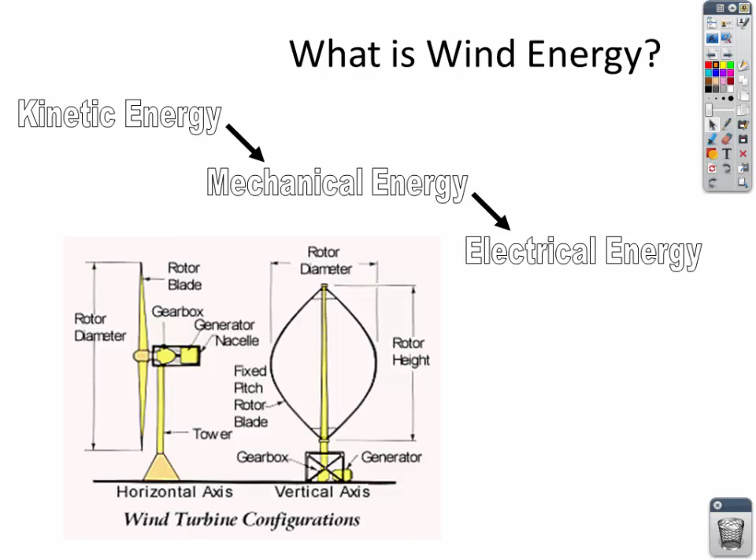What the gearbox does is it takes this rotor and it accelerates the spinning of that rotor to generate a little bit more electricity within the generator. So that gearbox is an integral component, but if you notice here, very simple process. Using the wind to turn a turbine, that rotor is connected to the turbine, which is connected to a generator to create electricity.

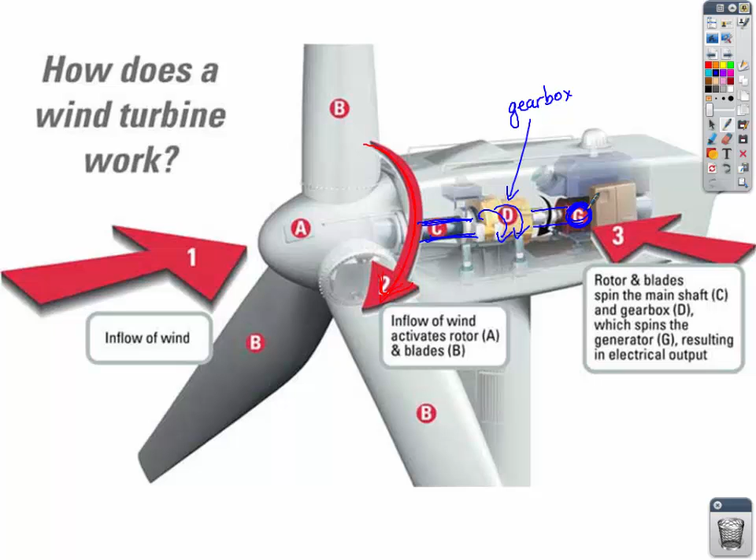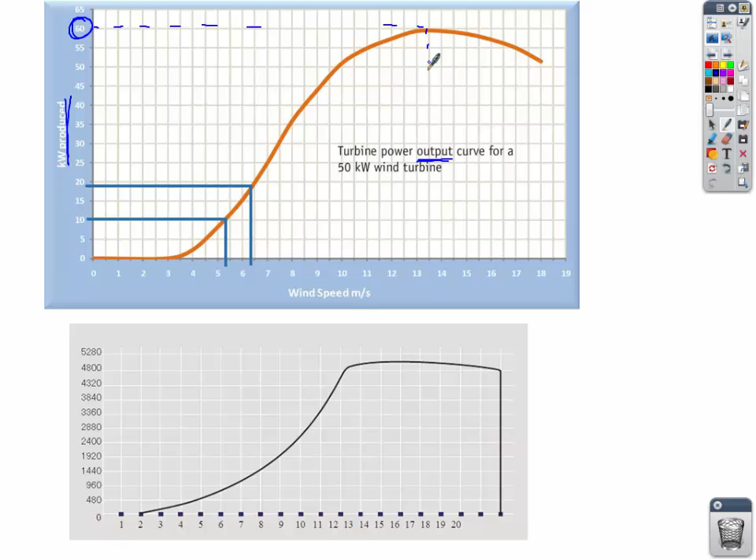What's interesting is a lot of people think that the faster those turbines spin, the more energy you're going to create. It's actually the opposite. There's an optimum output for wind turbines. If you notice here, kilowatts produced is along the y-axis, and we're going to max out around 60 kilowatts produced. But that occurs at around 13-14 meters per second for wind speed. The faster the wind speed, at some point, around 15 meters per second, you're actually going to start creating less energy. And at some point, the turbine is going to shut off altogether.

What this does is it protects us from thunderstorms and hurricane winds. The turbine doesn't spin as fast as it possibly can, because it might break. It might cause mechanical failure. So what they're programmed to do is, at a certain wind speed, literally shut down. So it's not the faster the better. There's an optimum range for power output when it comes to the spinning of a wind turbine.

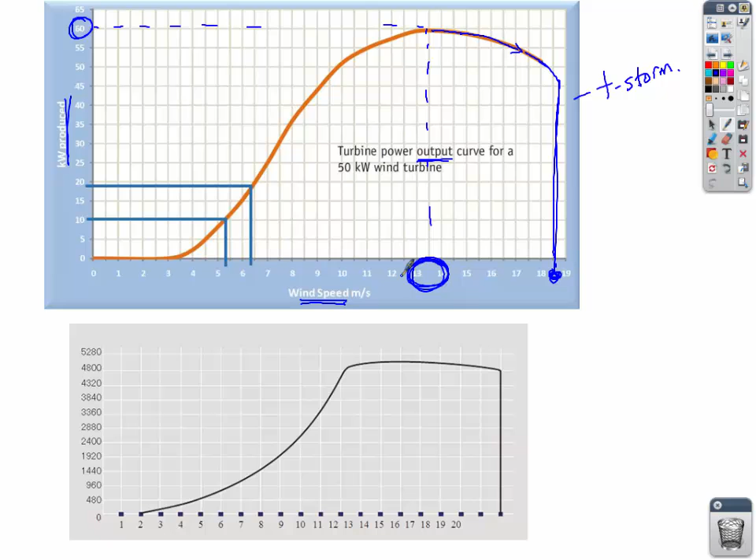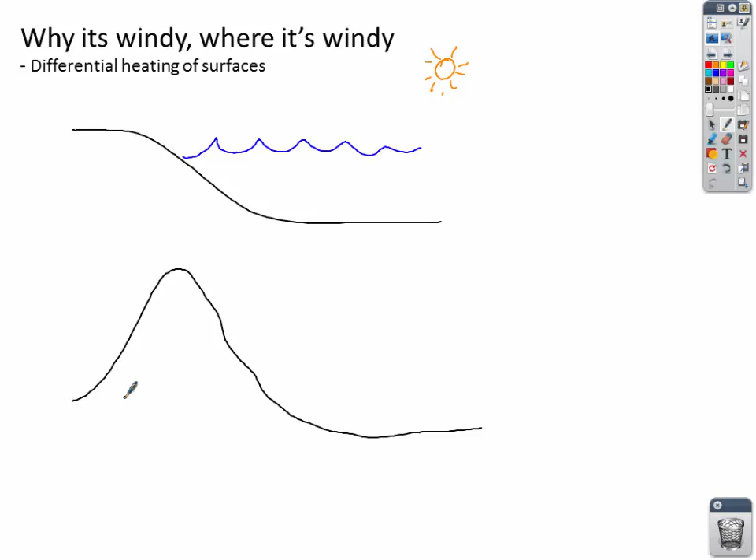What we're going to do here is draw the beach, okay, get you all excited for going to the beach this summer. And then we're also going to draw a mountain and a valley. And let's name this mountain the Rocky Mountains. And let's name this valley the Great Plains. Okay, this lesson on meteorology is the heating of two different surfaces.

For example, during the day at the beach, the sand is going to heat up a little bit faster than the water. So air is going to start rising over the sand. Well, in turn, air can't not exist at the surface, so air needs to be replaced. So it comes in from the ocean. So you have what's called a sea breeze. Right, air coming from the ocean.

Alternatively, at nighttime, the sand will cool quick and air above the water will rise. So air gets replaced from the land. So you have a land breeze. Nevertheless, you always have a breeze, day or night. There's always air moving because of the differential heating of these two surfaces.

So this is where we're going to put our wind turbines. We'll put it either offshore or we'll put it just on land, because it doesn't matter to the wind turbine whether the air is coming from the land or from the ocean. As long as air is moving, there's wind. Okay, so we'll put them in those locations on coastlines.

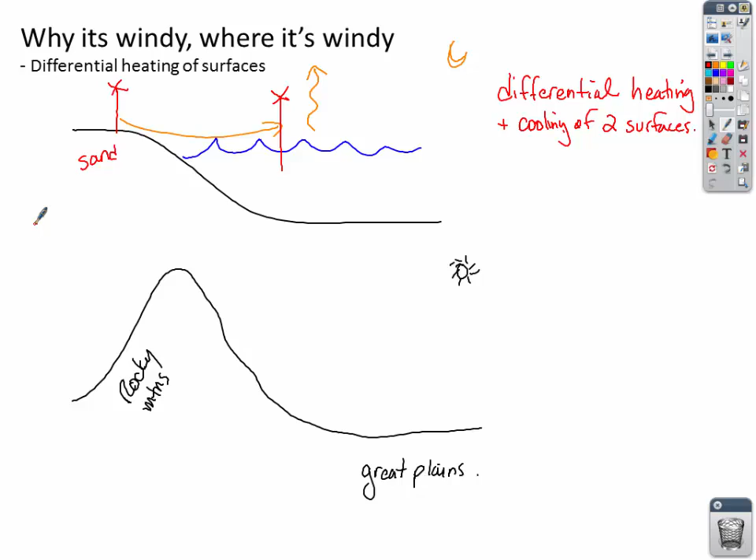Alternatively, look down here during the day, all right, at the Rocky Mountains. You have two different surfaces. You have rock and you have soil. All right. During the day, the air above the rock is going to heat faster and therefore rise. So you have air being replaced from the valley.

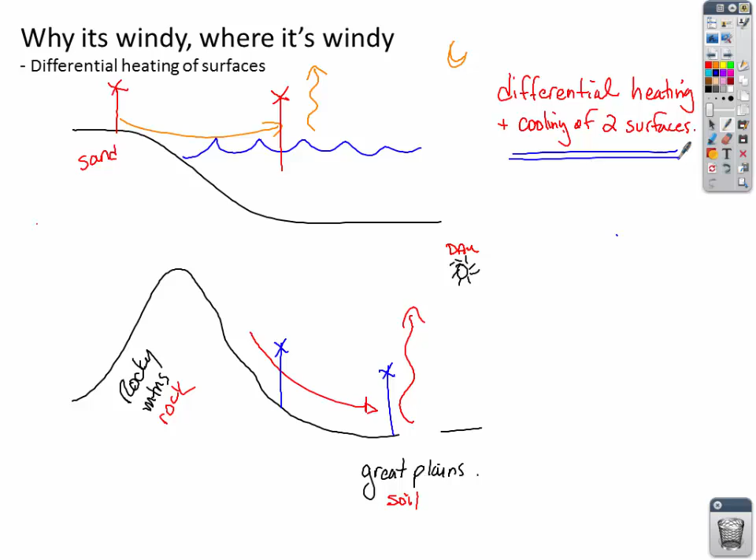All right. Over the course of the nighttime, you have the opposite. The valley will hold its heat a little bit longer, and air above the valley will rise, and it'll get replaced from the mountains. So here is a second place where we'll build our turbines, at the mountain and the valley provinces. All right, so because of that differential heating and cooling of two different surfaces, we have air moving in these places, coastlines and in valleys.

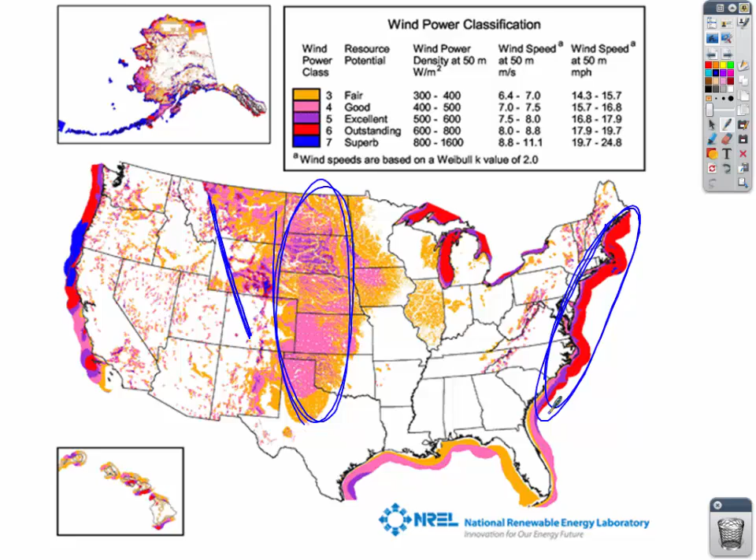Doesn't really work down in the southeast, all right, where it's just so warm. The difference between the heating and cooling rates really isn't there. Okay, so it's not really a good place for wind down in the southeast of the United States. So at the top 10 states, you're looking at Texas, all right, Kansas, Montana, those in the wind belt.

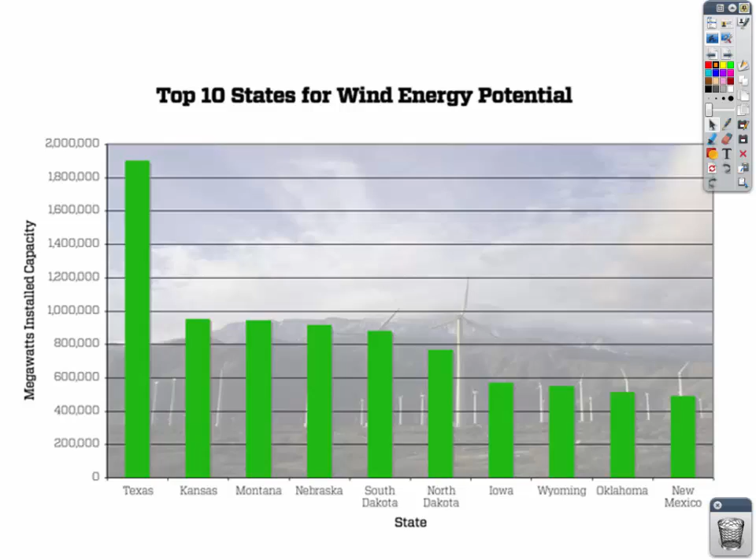Pennsylvania, you will see wind turbines as you get into these mountainous regions. If you take 309 or the Turnpike North, you'll start seeing wind turbines as you get into these mountain and valley provinces where there's wind at enough scale and enough reliability that you can get energy out of them. So you'll see these bands as you either drive west or you drive north and west. And then along Erie here, because of the land and the water, differential heating and cooling of those surfaces, you'll see wind turbines in and around the Erie area as well.

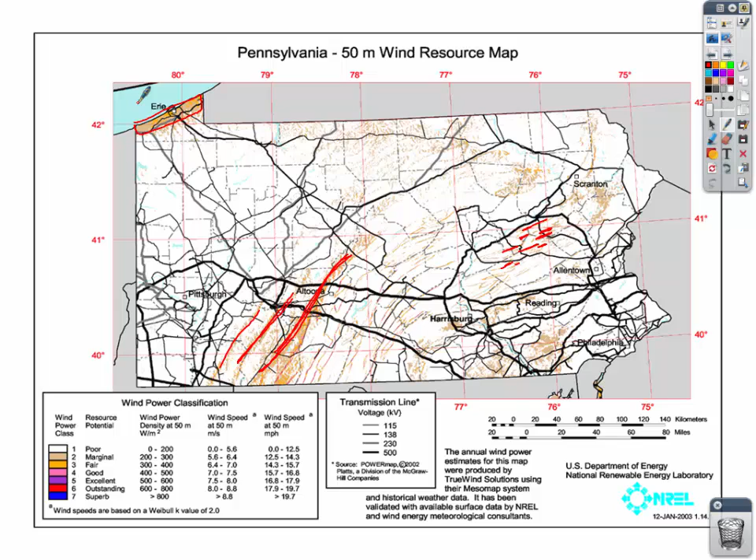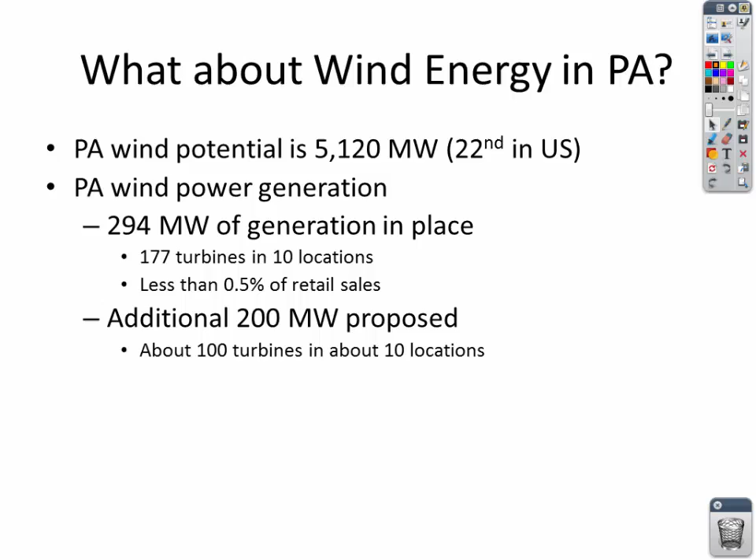But when it comes to Pennsylvania, we don't invest too much. All right, we're 22nd in the United States. If you remember, we're a coal and a nuclear state, so wind isn't really something we're too heavily invested in. However, it does provide some supplemental energy to our state. Okay, but when you look at the world, we have been surpassed by China.

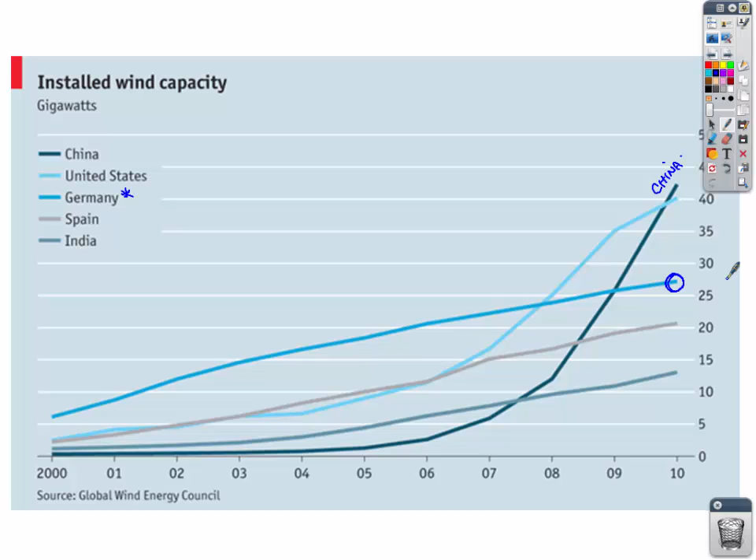Okay, China leads the world in wind generation. They have recently surpassed the United States within the last 5 years. Okay, now, other countries of note. Germany does a real good job with wind. They might not be generating as much energy as the United States and China, but remember that their country is a lot smaller. They get a tremendous amount of their personal energy out of wind. And they're very mountainous, so it's the mountain valley provinces where they're installing these wind turbines and wind farms.

All right, wind energy systems, you can have wind energy systems on the small scale. You can use it for your personal home to supplement existing energy sources. You're never going to use a wind turbine at your house for all your energy needs. However, you can use it to supplement an already existing energy source. Take a little bit off your energy bill.

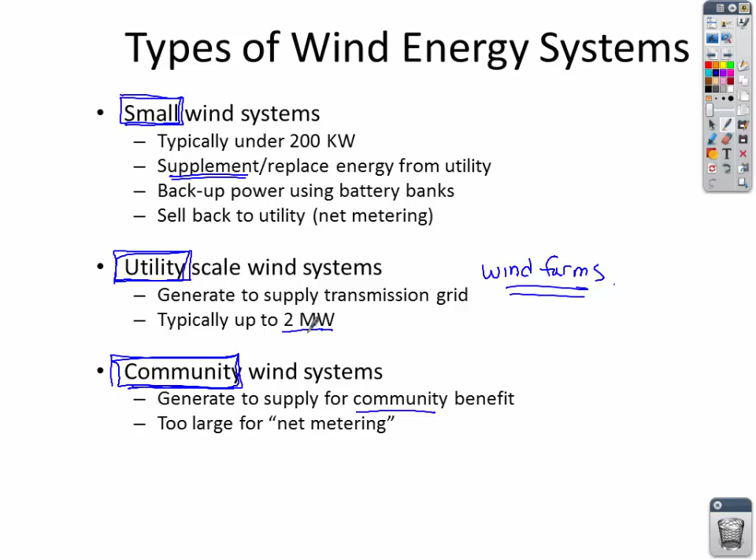You can use it on the community scale. There's areas where there's a development and they put in a small wind system, so only that local community can benefit. And then you can use it at the power plant scale. Hook up what's called wind farms and generate a tremendous amount of energy at the utility scale. However, if you remember about coal-fired power plants, a coal plant is somewhere around 1,000 to 2,000 megawatts of energy. We're looking at a lot smaller of production scale when it comes to wind.

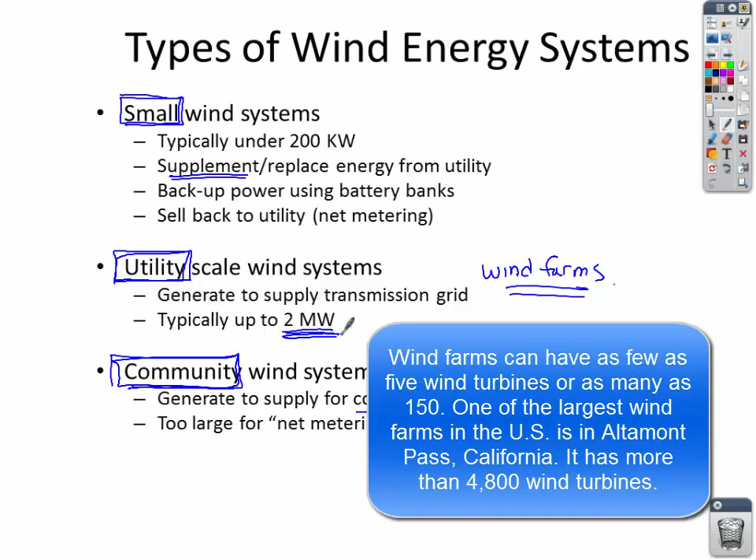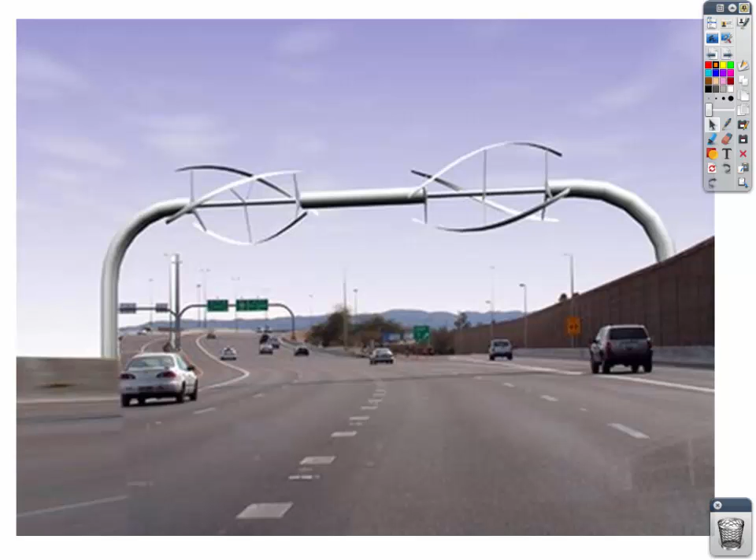Alright, where do you place a turbine? You might notice them on the tops of mountains, and they're as tall as they are for a reason. As air passes over a mountain, it can become turbulent from having to bump into more air that's all trying to go over this mountain. So what you want to do is tap into the most steady, sustained wind at a certain mile per hour. So above those turbulent winds that are all bumping into each other trying to get over the mountain, you want to tap into these winds that are a little bit higher, that are more or less steady and straight. Okay, and some of them actually have to compress.

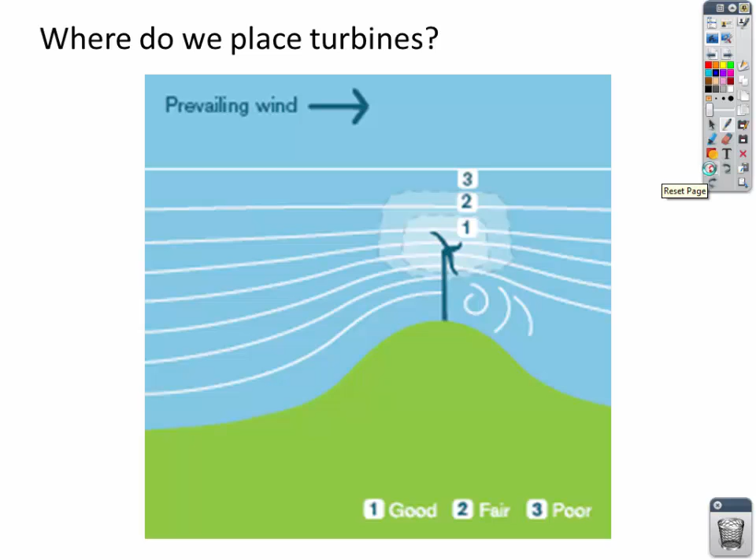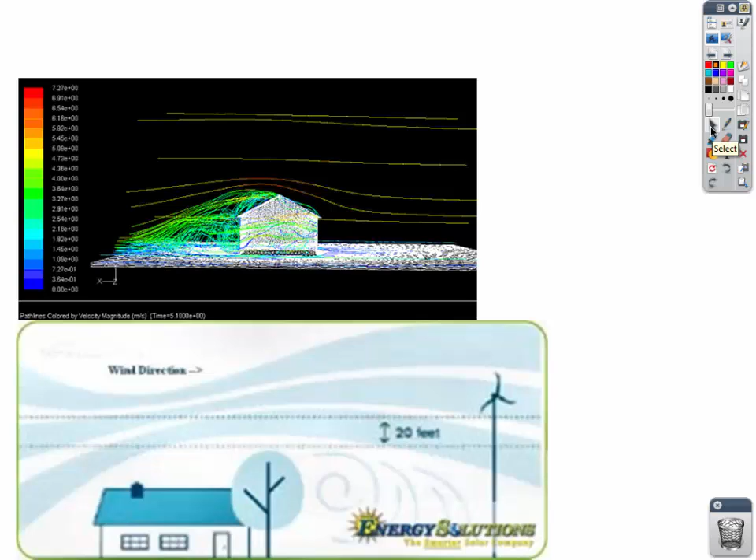When it comes to your house, you have the same situation. You want to place your wind turbine away from any obstacles, away from any turbulent areas. You don't want to put it near a tree where wind is going to be hitting the tree, and the turbulence is going to impact the ability of it to turn the turbine.

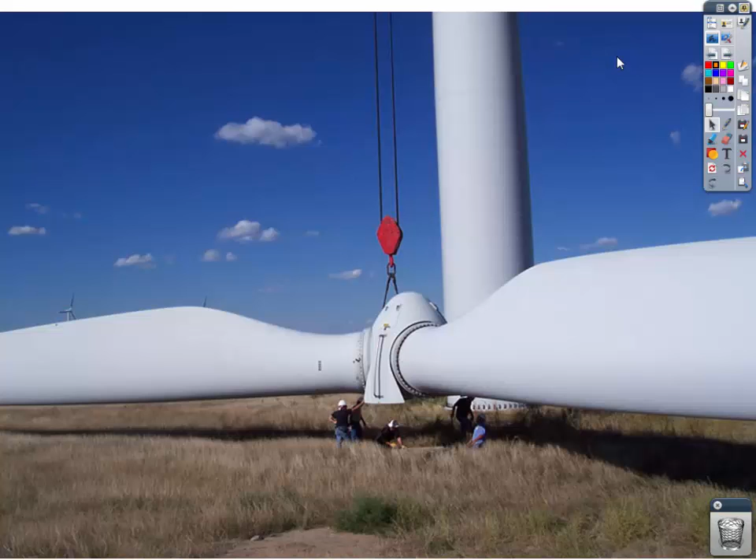Let's look at this thing on an industrial scale, and this is the size of one blade. These things are absolutely gigantic. Here are a bunch of engineers loading this thing onto a crane that'll pull it up on top of the shaft. And here's an operator at the top there guiding it into position.

There's a lot of benefits to wind energy. There's lower impact. And what I mean is that there's zero emissions. These are completely green. They're completely clean energy. We don't have to boil any water. We don't have to turn it to steam. There's zero emissions. There is no carbon dioxide. These are completely green. There's no water used.

You're still able to use the land. If you notice here in the lower right, we can farm right around these things. Very little impact. If you build them off the coast, you can still recreationally fish and boat around these things. You're still able to use the land. It's domestic. We have areas of the country that we can utilize. It's completely sustainable.

And it provides jobs. There's consistent maintenance of these things. There's construction and planning and operation. There's engineering. So it provides jobs. Lots of benefits to wind energy.

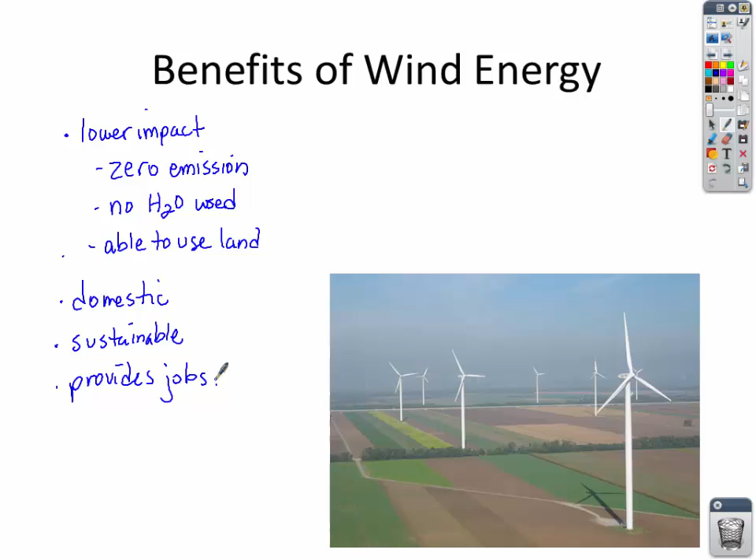You should know by now, as there are advantages, there are disadvantages. What if the wind isn't blowing? That's the first one everybody thinks about. We're working with an intermittent energy source, which makes it difficult for investors to want to go with this type of energy. Why not go with coal or natural gas, something that we know about and that is predictable and reliable? The cost is still a little bit higher than traditional energy. This still isn't mainstream. Traditional energy sources like coal are still maintaining a cheaper price.

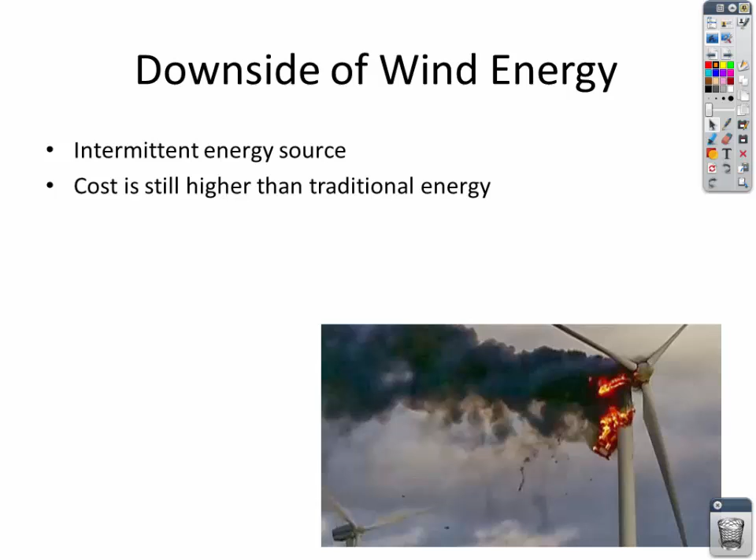We don't have the infrastructure, and this one I want to put a big asterisk next to. This is one of the major problems. Most of the areas that are great for wind are out in the middle of the country. North Dakota, Iowa. We don't have the infrastructure, the power lines built in place to capture that electricity and then move it to the East Coast where most people live. We don't have the grid. The grid is set up right now for our coal-fired power plants on the East Coast. We can capture the energy, we can get it, but we don't have the infrastructure to move it. And that's a huge problem with wind energy in the United States.

There are environmental impacts. People don't like to look at these. They call them eyesores. They create noise pollution, which is very real. If you can think about the noise that this might make, that low, droning, constant woo, woo, woo. If you heard that on a daily, nightly, weekly, yearly basis, it may have a physiological effect on you. So the noise pollution is real.

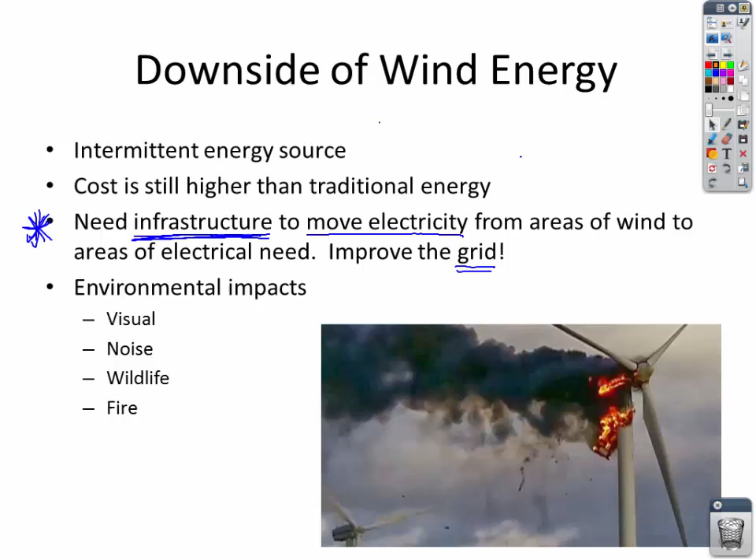As is its impact on wildlife. There are some minor impacts on wildlife, and then what if it catches on fire? You literally have to watch it burn, keep people away, because a couple 100,000-pound wind turbine is going to fall down. So there's really not much you can do when it comes to a burning wind turbine.

When it comes to bird impacts, wind turbines really play a small part. A lot of people think that these things kill birds and they're going to cause extinctions of certain bird species. But if you're really concerned about birds, we should quit building buildings and windows, because they by far cause more bird deaths than wind turbines.

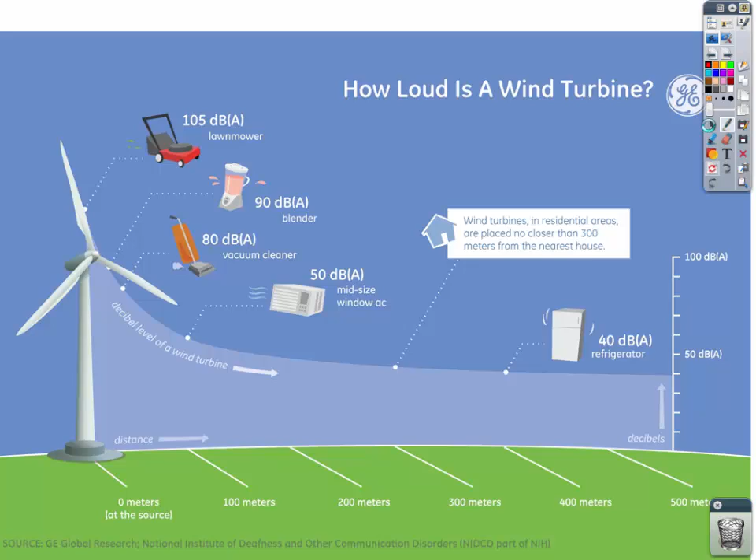So that setback becomes important because the closer you are, the louder it gets, and people can have some real physiological effects from the noise pollution that these things generate. People have been known to experience headaches, loss of sleep, aggravation, things like depression. So the setback rule is something that we need to consider. Others just don't like the way they look.

People want wind energy. They really believe wholeheartedly. They know it's a green energy source. There's no emissions, no water, but it's that NIMBY syndrome. Not in my backyard when it comes to wind energy. So this is a tough one, and hopefully this mini lecture here gives you a sense of the advantages and disadvantages and the basics of wind energy.